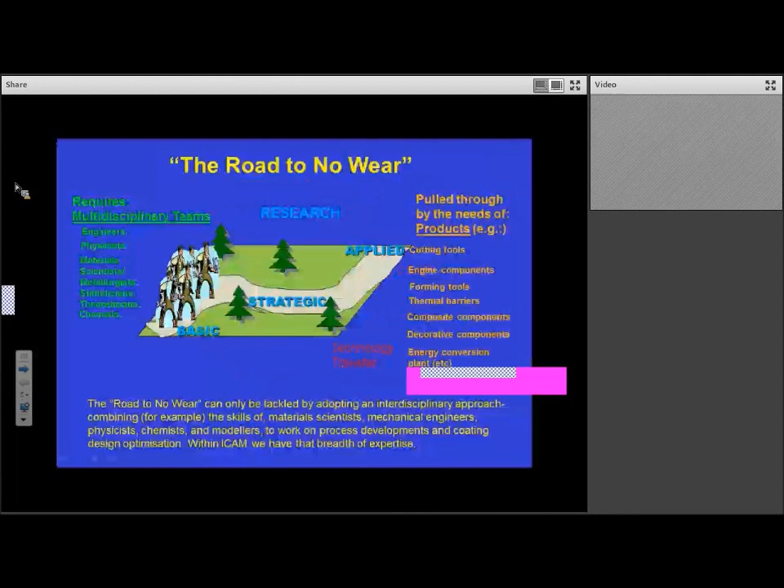The first reason is if we think about the move between research through to products, it involves an array of people: engineers, physicists, material scientists, metallurgists, statisticians, theoreticians, chemists, chemical engineers, etc. It needs all of those people to travel along this road to reach solutions for the actual end-use applications, which can be very varied in their anti-wear requirements. Within ICAM, we do have access to that whole range of skills and abilities and knowledge.

So that's the first analogy for the road to nowhere. The talk will begin with an explanation of historical background to tribology, the study of friction and wear, or rubbing surfaces. I'll talk about the importance of hardness and elastic modulus and their ratio, the importance of resilience and toughness in coatings and surfaces, the requirements of different tribological contacts, and the benefits of nanocomposite, nanolayered, and glassy metal coatings to solve the problems we identify, finishing with duplex systems and some final comments.

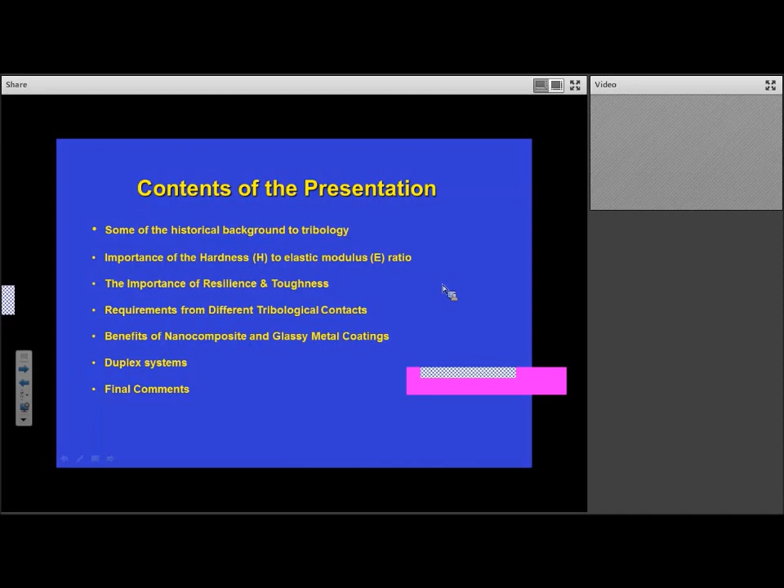If we think about the history of tribology, a colleague of mine, Kenneth Holmberg, was first to point out that we tend to study tribology at different length scales. Putting that on a time base, we realized that before the Industrial Revolution, people were interested in large machinery on the meter and decimeter scale, looking at efficiency, reliability and lifetime. Then we started looking at the decimeter down to several millimeter scale, studying torques, forces, vibrations, clearances and alignments, etc.

Then Hertz came along with his contact theories of elastic contacts, able to look at things like contact pressure, pitting and scuffing. Around 1950 was probably the birth of what we regard as tribology in its modern sense, beginning with the group in Cambridge, Bowden and Tabor, and other groups around the world. They started to look at fracture, elastic and plastic contact of asperities and deformation, debris creation and surface layers, etc.

In this present century, we've entered the age of nanotribology, which has enabled us to better understand what's gone before. We now have the tools and techniques for a better understanding of tribology. So we started at the macro scale with large machines; now we look at material transfer, tribochemical changes, micromechanical changes, cracks and fracture, and interactions on the atomic scale.

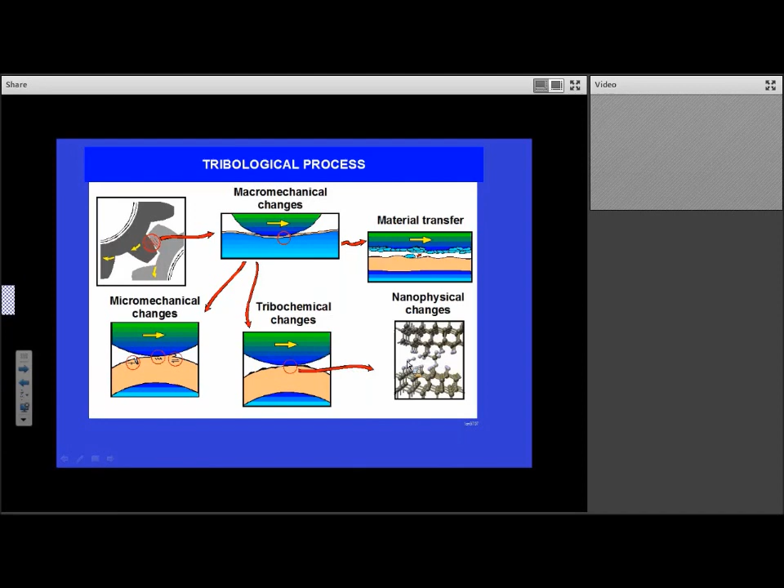However, going back to the 1950s and the Cambridge group, there was a desire to develop a kind of unified theory of tribology and see if there were straightforward equations to describe wear. Many came up with the idea that wear equals a constant times load over hardness — generally regarded as Archard's law. Regrettably, that turns out to be incorrect, and there are other properties as important as hardness.

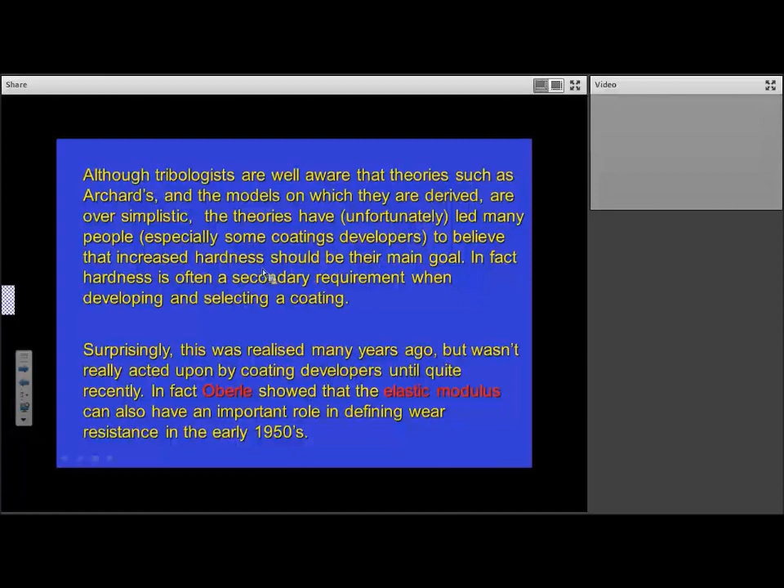A gentleman called Oberle, at the Caterpillar Company, recognized this in the early 50s, but his work was ignored. He published a paper showing that elastic modulus can also have an important role in defining wear resistance. Tribologists probably realized Archard's law was oversimplistic, but it led many people to put too much emphasis on hardness, considering it the main requirement from coatings. It's taken some time to reverse that overemphasis.

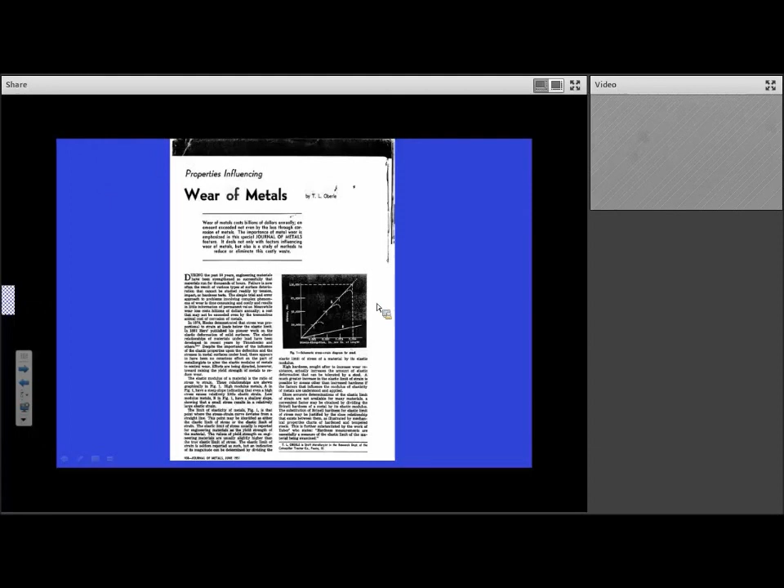This is Oberle's paper from the Journal of Metals in 1951, in which he pointed out the importance of elastic modulus. He defined what he called the Modell factor: Brinell hardness divided by elastic modulus. He found wear decreases with increasing Modell value — decreasing with decreasing elastic modulus for materials of similar hardness — but actually increases with increasing hardness if that increase is associated with an increase in elastic modulus.

He found this by doing lots of tests and ranking materials. This is an extract from one of his papers, where he got a better correlation between wear and the Modell factor than between wear and hardness, or wear and elastic modulus alone.

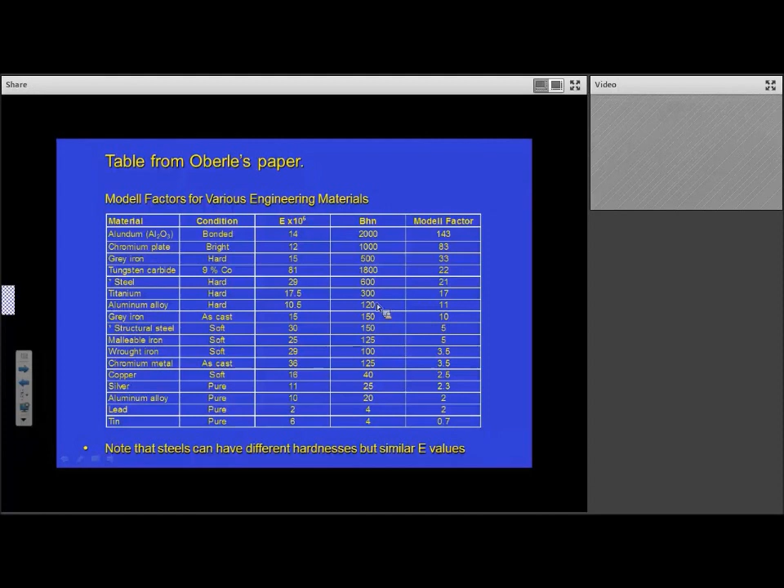And of course we can put that onto more consistent units now. We can define elastic modulus in gigapascals, and hardness in gigapascals as well. What we find is that materials with good wear resistance tend to have an H/E ratio of around 0.1 or higher. Rubber is very high, but that's a special material, and we can't make engine components out of rubber, but we can use it for tyres. Our aim in coatings development is to try to develop coatings with an H/E greater than 0.1. It's a good objective to have.

We shouldn't be surprised that H/E is important. We know that hard ceramics are wear resistant because they have a high hardness, and elastomers like rubber are wear resistant because they have a low elastic modulus. These materials are wear resistant because they're difficult to deform plastically, those because they are easy to deform but spring back. So it's understandable that a combination of those properties might give us a good indication of wear resistance.

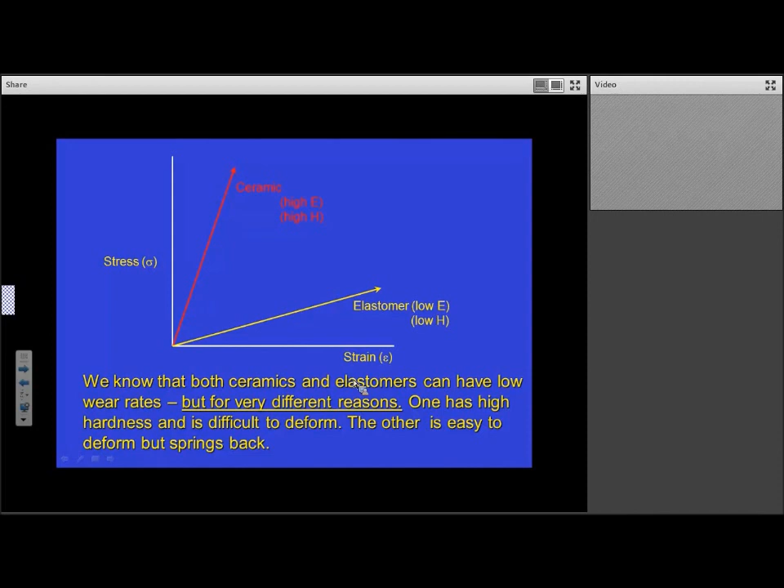Although Oberle was the first to identify the ratio of hardness to elastic modulus as an excellent ranking parameter for wear resistance, it turns out that bearing designers have known it for many decades, and they use something called the plasticity index when deciding the mechanical properties and surface finish needed on bearings. This plasticity index has an E/H ratio in it, and also another factor related to surface roughness.

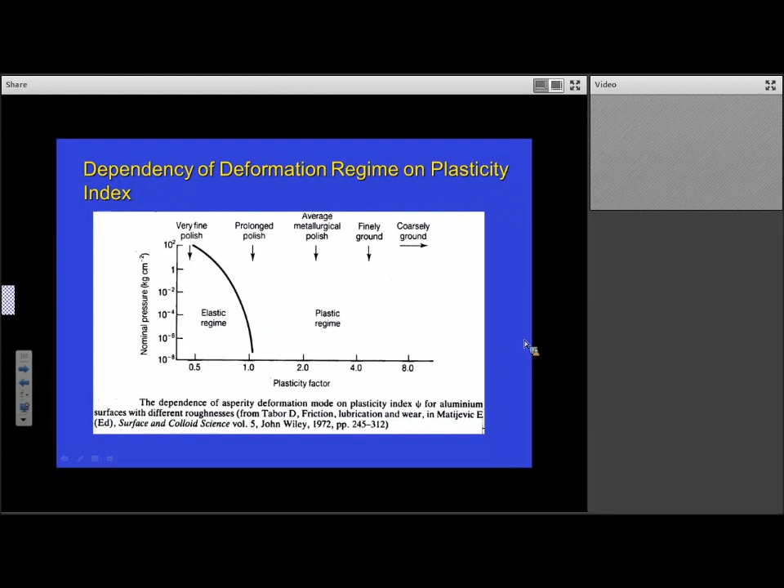The bearing designers thought they had little control over this parameter, so if they wanted to prevent a rough surface from exhibiting any plastic deformation, they'd have to polish it to a very high level to avoid plastic deformation of asperities. In textbooks you see this kind of thing, showing that to ensure a surface remains elastic and asperities don't plastically deform, you have to polish them right down to a very high finish. Now we can actually get a low plasticity index just by controlling the elastic modulus and the hardness.

That index was originally developed for uncoated surfaces, and the consideration of the elastic modulus to hardness ratio is even more important for coatings. That's because the E/H ratio defines the elastic strain to yield - the amount of strain a coating can take before yielding, and therefore its ability to deflect in sympathy with the substrate. If you take the stress strain curve, the slope of the curve is the elastic modulus.

So E is equal to Y over the strain. In this case, the limiting yield stress is Y, and the limiting strain at the point of yield is epsilon F. So E is equal to Y over epsilon F, meaning epsilon F is equal to Y over E. Since Y is directly related to hardness - typically hardness is 3 times yield stress for most surfaces - you can see that the elastic strain to yield is directly related to the ratio of hardness to the modulus.

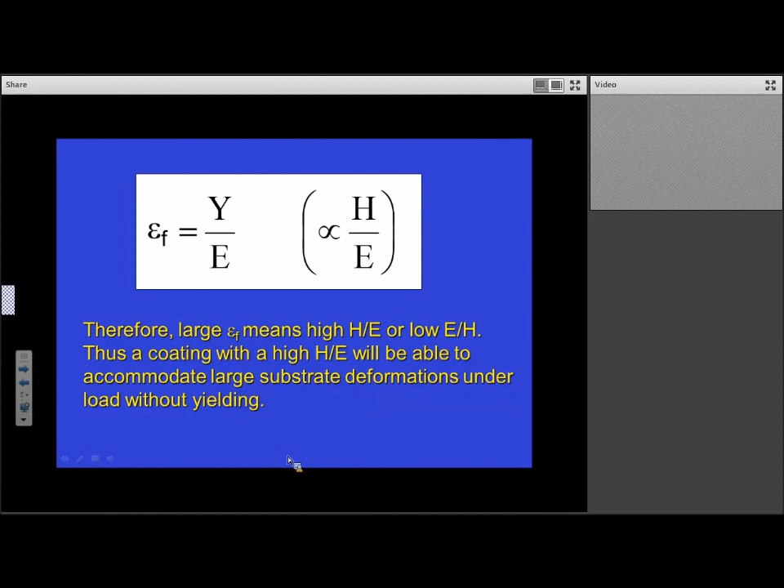So that's one reason why H over E is important for coating. Taking a simplistic view - this is just representational, not an exact scale diagram - if you had a coating which happened to be slightly softer than another coating with a lower elastic modulus, it could have a longer elastic strain to yield and therefore would protect the underlying material for longer, at a higher level of strain. So this coating could protect the material even when it's strained beyond its yield point, which would be an excellent property for a coating to have if it continues to provide protection even when the underlying surface has yielded.

There's another reason why the H over E ratio is important. It's because it provides an indication of something we call the elastic resilience of a surface - its ability to absorb energy elastically.

If you take a simple tensile test as an illustration, you pull this tensile test piece up to a maximum load of P and an extension of X. The energy absorbed elastically is the area under that curve. If you think of it simply, it's the average force times the distance moved that is the work you put in. So the energy absorbed is that area, half P times X.

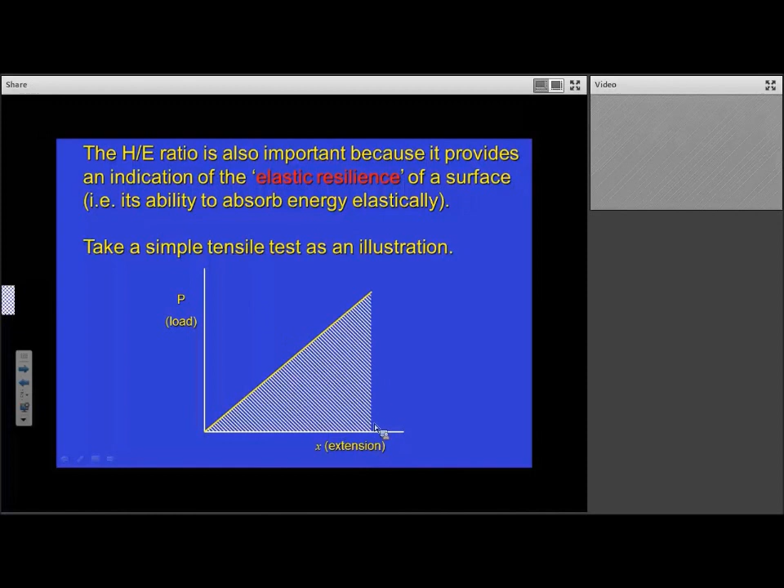Because that energy is half Px, and we know sigma is P over A, force over area, and epsilon, the strain, is equal to the extension over the length, you can transpose this, and it turns out the energy absorbed is sigma squared over 2E times the volume. The energy absorbed per unit volume is half sigma times epsilon, and that's the elastic resilience, a well-known parameter. Since the maximum sigma is related to the hardness, the ability to absorb energy elastically is related to H squared over E. So again, another reason why the H over E ratio is important.

Further work on modelling of surfaces was done by a real guru of elastic contacts, Ken Johnson in Cambridge. Ken Johnson literally wrote the book on the subject. He modelled a hemispherical indenter against a surface, and showed that the force required to yield a surface was given by this expression.

Again, you see here H cubed over E squared, so it tells us H over E is important. This is related to the fact that an elastic surface can spread the load more, so you have to apply a greater load to make it yield if the surface is more elastic, has a lower elastic modulus. That's where that formula comes from.

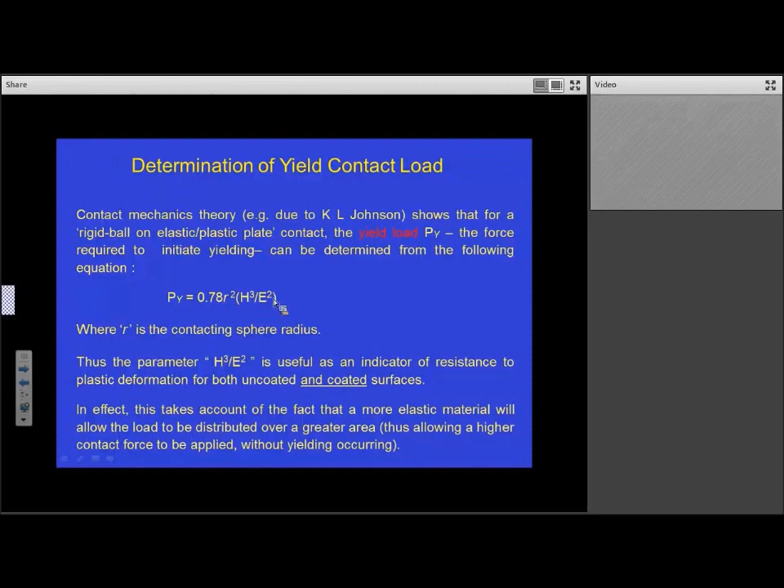There are also reasons of fracture mechanics. I won't go into it, but those familiar with fracture mechanics will know that work by Griffith and Irwin, etc., define a critical stress for crack propagation, sigma c, defined by this expression. Gc is termed the strain energy release rate, and it's a measure of fracture toughness. You can see here that Gc is sigma c squared pi a over E.

So again, we see from fracture mechanics considerations that H squared over E also gives an indication of the ability of a surface to prevent fracture. So yet another H over E ratio, which leads us to believe that the ratio of hardness and modulus is important in defining the wear resistance of the surface.

We can go further and say that H over E indicates the surface's ability to absorb energy and recover elastically, and it's particularly important in impact loading situations.

If you think about it further, the actual ability to absorb impact will be defined not only by the elastic range, but also the plastic range of the material.

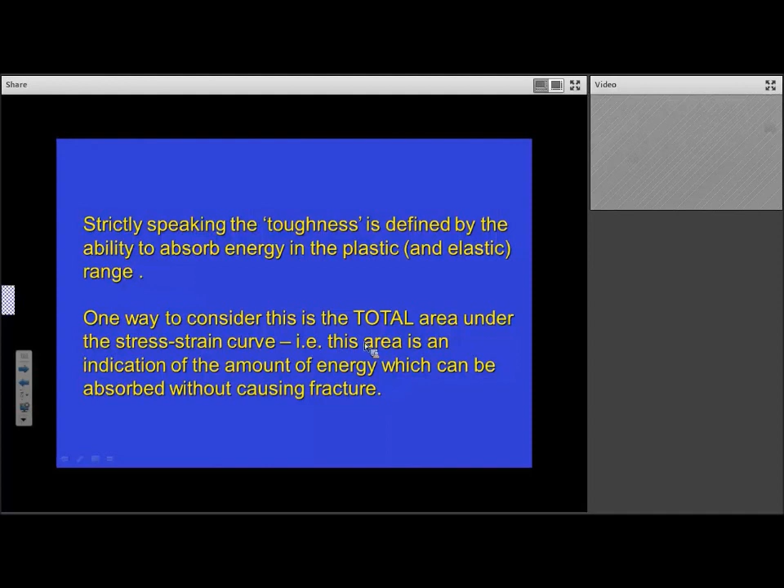A guy called Smart said that for cavitation, which is one particular kind of impact, what we should think about is not Y squared over 2E or H squared over 2E, but UTS squared over 2E. That's in recognition of the UTS being reached in the plastic state, so some ability to absorb energy can occur plastically. You should think about toughness being defined by the total area under the stress-strain curve, not just the elastic part, the elastic resilience.

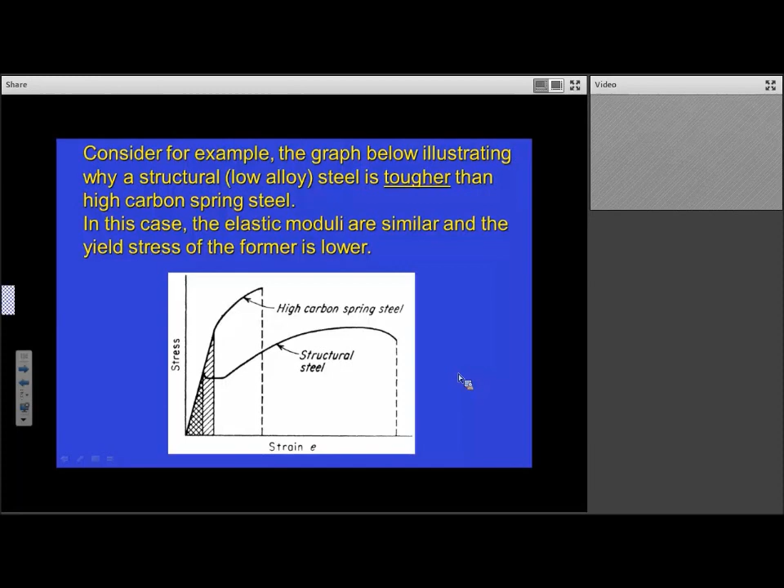So we know, for example, that a mild steel, a structural steel, is tougher than a high carbon spring steel. This might have higher elastic resilience, but the mild steel is tougher - more able to absorb impact. So now what we're getting into is that it could even be a good thing for a tribological surface to have some ductility, which goes right against the thoughts of those early tribology theorists.

There's also an argument around toughness for polymers. Another guru of the subject, John Lancaster, did a lot of studies and was one of the leading lights, sadly passed away in 2014. John looked at the wear of polymers and found that those giving the lowest wear rate were the ones with the highest toughness.

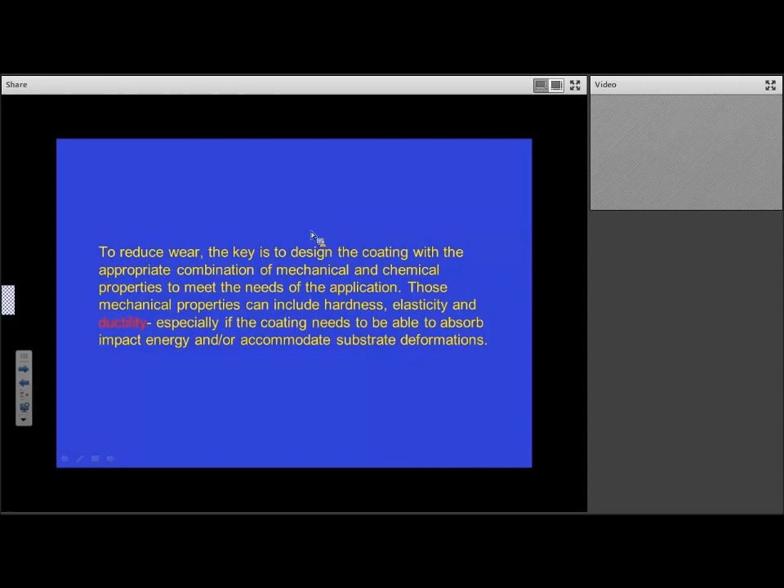So to reduce wear, the key is to design the coating with an appropriate combination of mechanical and chemical properties to meet the needs of the application. These mechanical properties can include hardness, elasticity, and perhaps surprisingly ductility, especially if the coating needs to absorb impact energy or accommodate substrate deformations.

If a coating contains a ductile constituent, it can be tougher. An illustration of how combining low and high modulus phases can be beneficial in a coating would be a multi-layered coating with a hard, soft layered structure.

Such a coating can deflect under load without fracture, since the softer, lower modulus layers absorb the shear deformation.

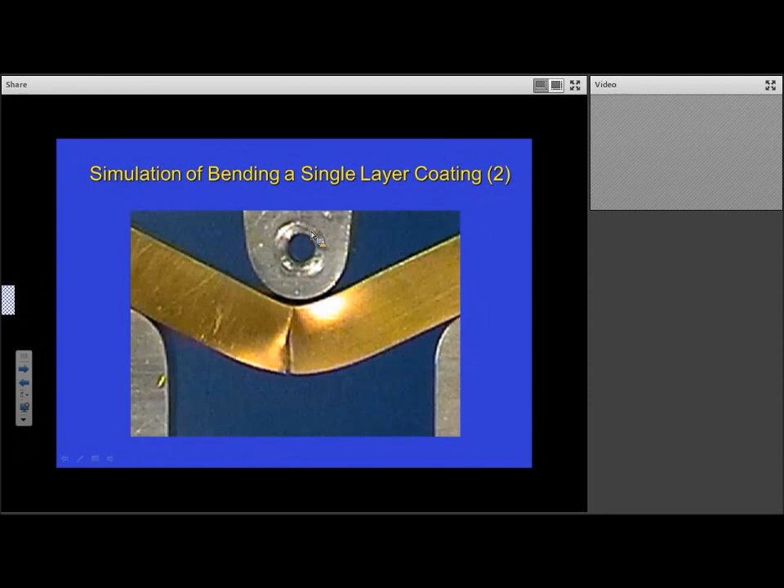If you consider this as a thick coating and you load it, and the substrate deforms, the coating could crack. If, however, you have a thick coating with layers of hard, soft - or high modulus, low modulus another way to think of it - and you load it, then it won't crack.

The hard layers are thinner, so they don't see such a high bending stress because they're thinner, and they're allowed to deform because the shear takes place in the soft, low modulus layers.

If you think of a paperback book and you bend it, it will obviously bend. Even though it's wood really, if it was a block of wood it would break. Because the layers can slide over each other, they don't break, and each layer is thin, so it doesn't see a high bending stress.

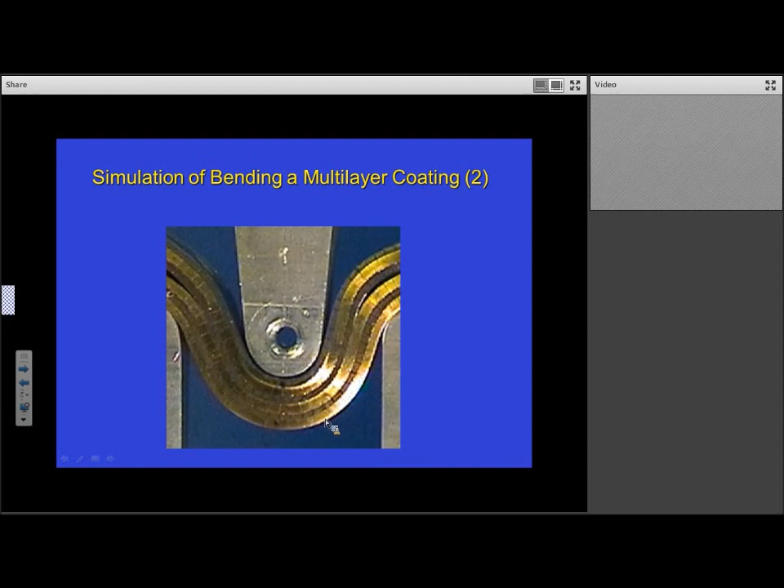Those of you who studied stress analysis will recall that the maximum stress increases with distance from the neutral axis. So from a thick section you get a high bending stress. For these thin sections, you get lower bending stresses and an ability to accommodate deformation.

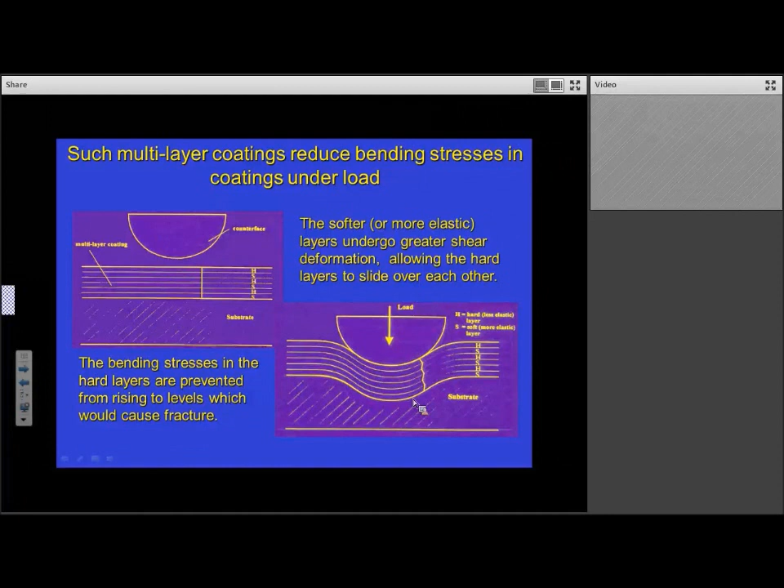This shows how, hard soft, the shear takes place in the softer layer. But this is just meant to represent how it's better to combine properties in a coating, to combine hardness and ductility and elasticity, in order to get the optimum response to loading.

So how can we achieve that obviously desirable combination of hardness, elasticity and ductility? One answer is by using nanocomposite or nanolayered coatings.

This is the other area where the road to nowhere comes in, because even the Romans knew that the best way to create a wear-resistant surface was to have hard blocks separated by a compliant, if you like, grain boundary phase, which can accommodate the deformation.

As the chariots rode over this road, if that was a solid piece of stone, it would just break up and fail. Whereas with this kind of construction, a cobbled road construction, it can accommodate the loading and deformations without failure. This is where we take that analogy of the road to nowhere a step further.

We use this concept to help us design nanocomposite coatings.

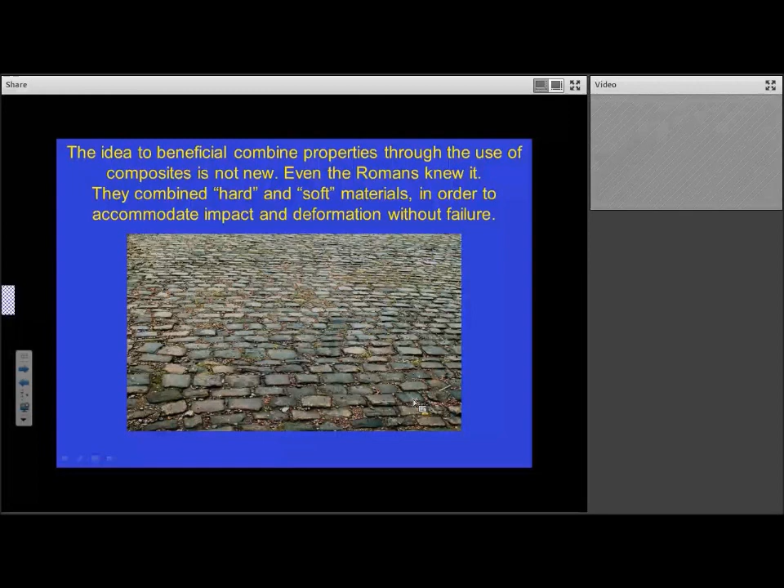There's an illustration here of a real-life multi-layer coating. This is a multi-layer titanium nitride coating. Titanium nitride coatings typically spall off at about 10 microns thick due to buildup of stress.

But by having this kind of thick coating in a multi-layer, it survives and accommodates deformation very well without debonding. These kinds of coatings are now used on compressor blades, especially where they're used in sandy, abrasive environments. This information is courtesy of Wallwork Cambridge, Tecvac.

So a perfect example there of a real-life coating which would fail if it wasn't for the fact that it combined hardness and ductility and an ability to absorb impact energy.

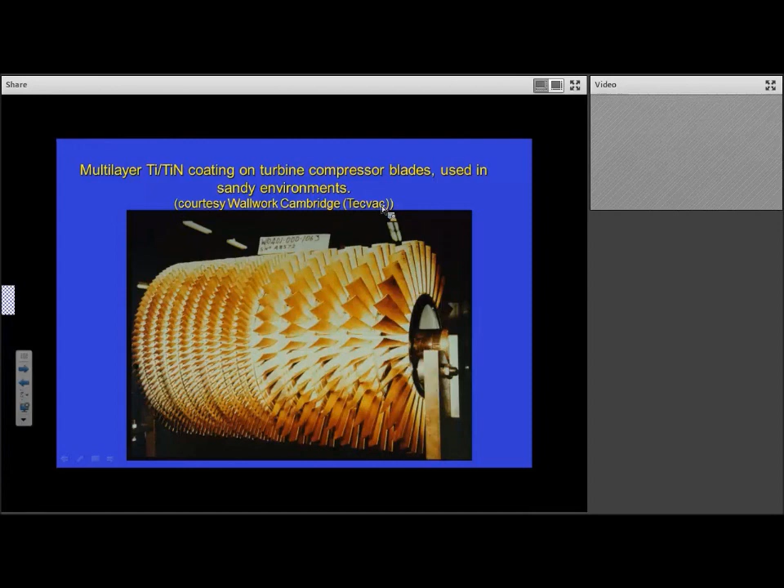So why, that's a layered structure, but why are nanocomposites even better? Well, a number of reasons. One, with nanocomposites, is we can get so-called Hall-Petch hardening. We can get grain size induced hardening.

We can retain the elastic modulus of the metallic species in that composite. And there's a further benefit: the corrosion rates are more uniform. Intergranular corrosion is suppressed, so degradation is more uniform and predictable. We don't get localized pitting corrosion.

So overall, with a nanocomposite, we get an enhancement of H over E, and we get good corrosion resistance and better wear resistance overall.

One of the earliest proponents of nanocomposite coatings was a guy called Musil in the Czech Republic, Jindřich Musil. He originally said the idea would be to have a metal nitride in, for example, an amorphous soft metal grain boundary phase.

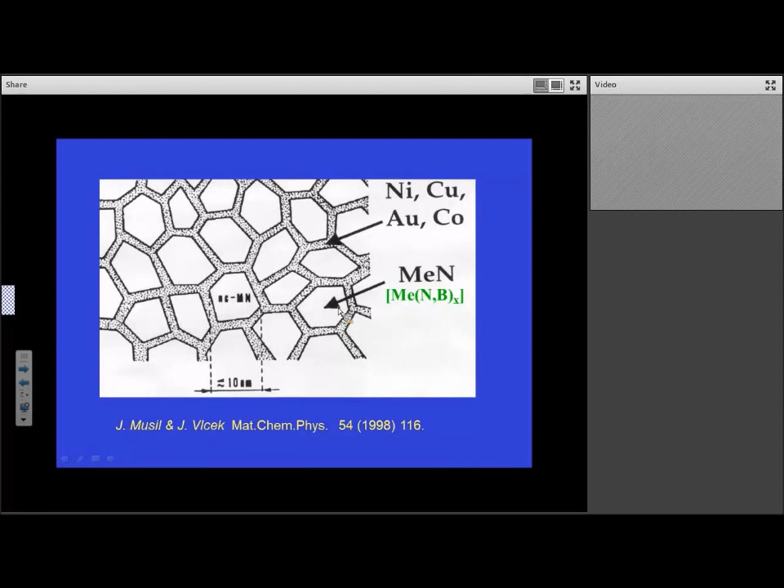Our approach is to go slightly further than this. What we're looking at is nitrogen or boron interstitially hardened metal crystallites within a soft metal matrix, to try to retain that metallic characteristic in terms of ensuring a low modulus phase, but still getting a hardened effect due to the interstitial hardening within the grain.

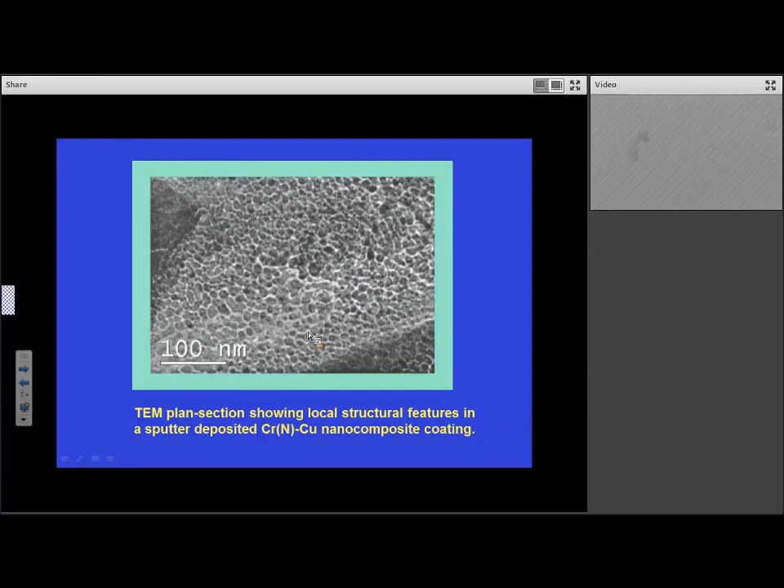This shows a typical example of such a coating: chromium with nitrogen interstitial hardening in a copper grain boundary phase. These coatings are remarkable because they're basically metallic, but they have ceramic-like hardness levels, yet metallic-like elastic moduli.

They can accommodate deformation, which means they perform very well in a tribological situation because of their ability to absorb and accommodate deformation while still being quite hard.

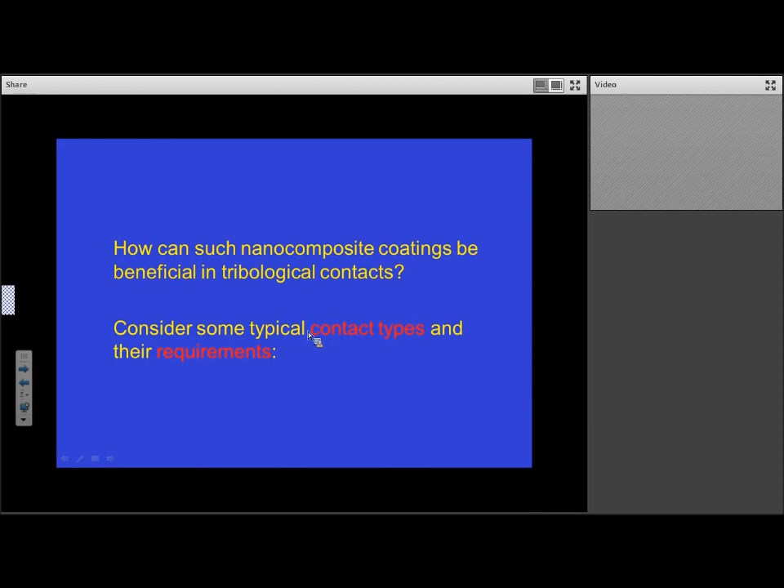So how does a nanocomposite coating be beneficial in tribological contacts? What I want to explain is that the requirements of different types of contacts are many and varied, and they aren't just hardness. So we can't just believe Archard's equation.

We can't just assume that we need hardness to get appropriate reductions in wear. So we look here at 7 typical types of contact, and I'll go through each one and explain what we're looking for in terms of the properties of the coating and the underlying substrate. For example, with a simple static contact stress, you need load support, adequate strength within the coating, adequate hardness, and sufficient toughness.

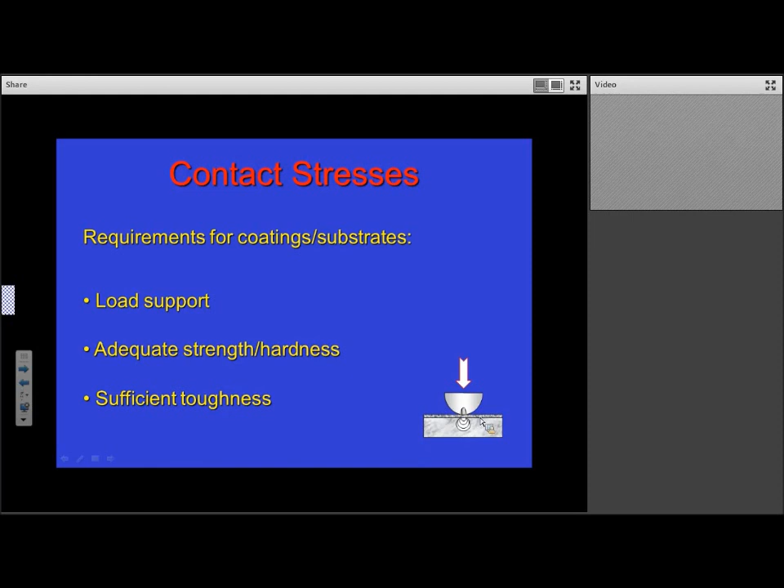Toughness is clearly important. You don't want cracking to occur. For a sliding contact, you probably need low friction. You need sufficient adhesive strength between the coating and the substrate, and adequate cohesive strength within the coating and within the substrate as well. And you need sufficient elasticity in the coating to deform with the substrate without fracture.

For a fatigue situation, normally you need good surface finish, crack arresting capability, adequate hardness and toughness as well. So although hardness comes into many of these requirements, it is by no means the only requirement.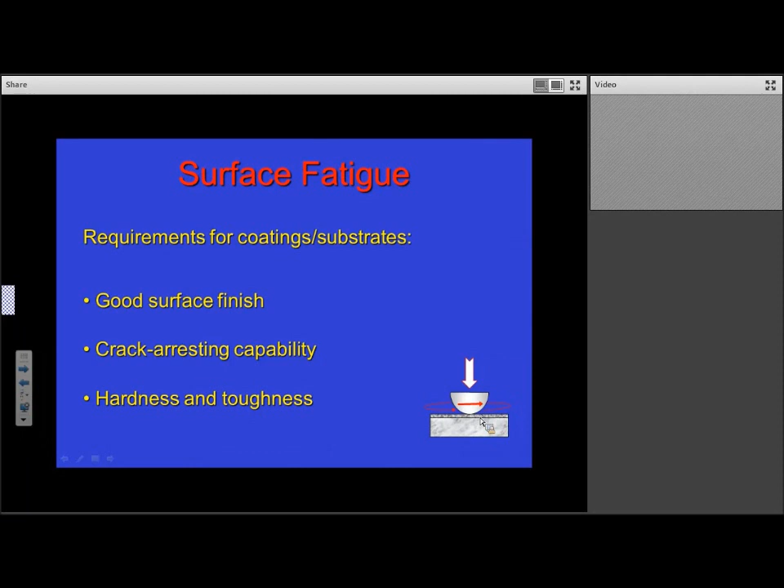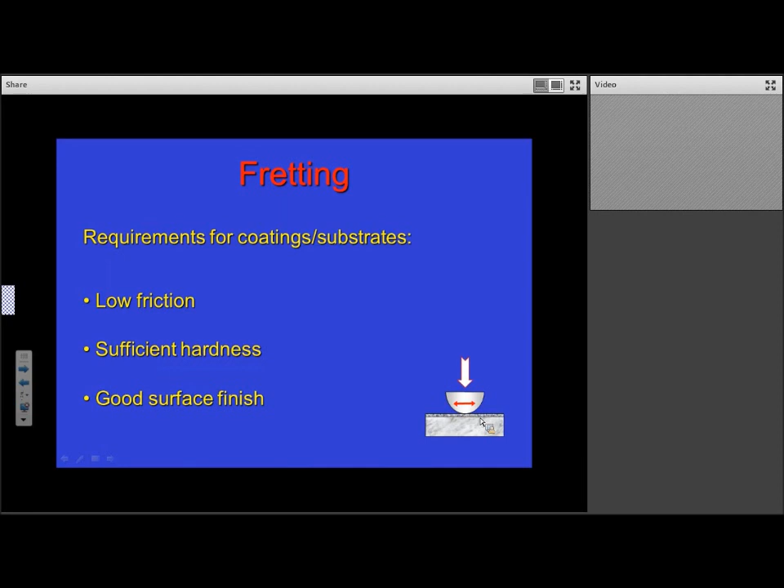If you think about fretting, that's a low amplitude fatigue type situation. You often need low friction, again sufficient hardness, but there's still a lot of discussion over the relative importance of hardness and ductility in fretting contacts, and you need good surface finish.

In abrasion, that's probably the mechanism where you really do need hardness. Many studies have shown that typically to resist abrasion by a hard abrasive particle or a hard counterface, your surface should be at least 30% higher in hardness than the abradant.

So for sure we need hardness, but we also need toughness. We need adequate thickness of the coating so that any abradant doesn't penetrate through it. And then you need load support underneath the coating, again to prevent that abradant penetration through the coating.

Another of those types of contact which I illustrated was impact. Requirements for impact resistance are definitely toughness, ability to absorb energy. So you need elasticity and deformability, good adhesion of the coating to the substrate, and cohesive strength both within the coating and within the substrate.

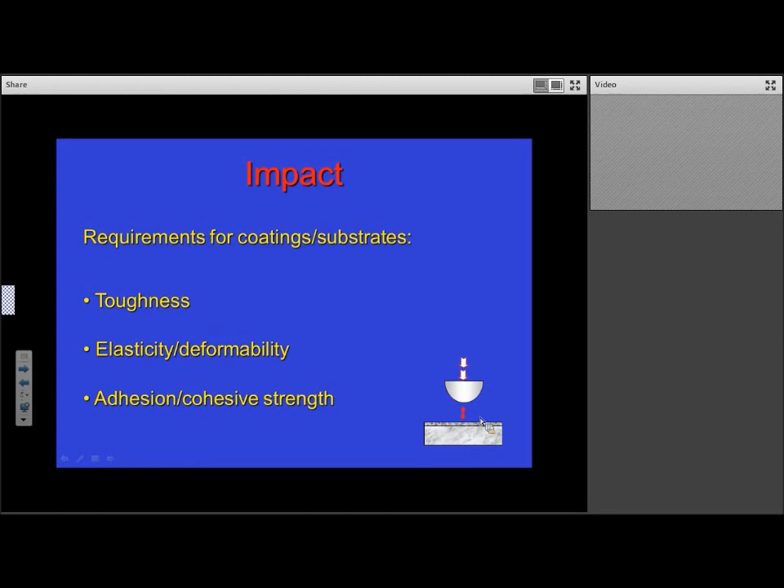And then the final schematic I showed of a type of contact was chemical dissolution or corrosion. In that situation, you need a pore-free structure, ideally, and you're going to need either a completely chemically inert barrier, or suitable galvanic properties within the coating. So again, we saw that many of these nanocomposite coatings give a dense, relatively pore-free structure.

So requirements for wear-resistant coatings are clearly complex and depend on the type of contact. But the other point to make is that all of those contact types could occur together, remarkably, and to different extents during the life of a component. So any coating you develop or apply should ideally be adaptive to changing contact conditions.

Sometimes we call these chameleon coatings or adaptive coatings. So that's a further requirement, and it has been found that nanocomposite coatings do provide the possibility to add this adaptability to the coating.

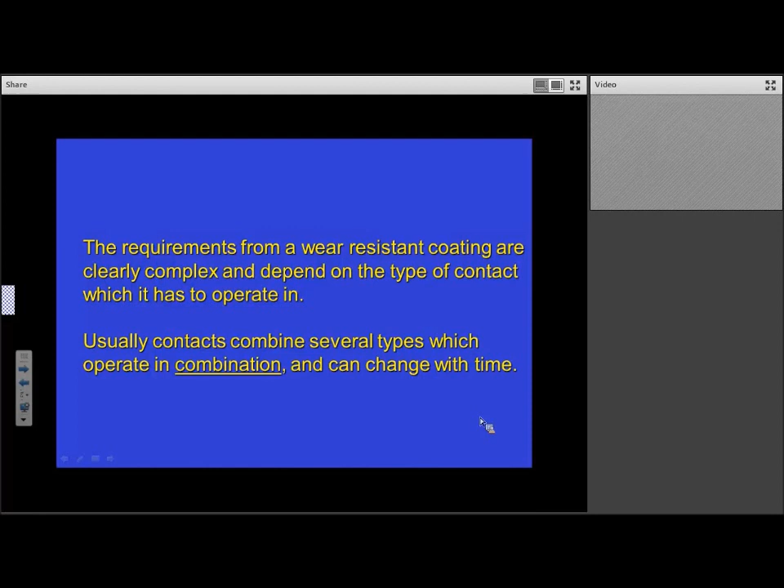So I would say that most tribological testing has historically tried to model just one type of contact, such as a unidirectional sliding contact, like a pin on disc. And much theory, including Archard's, is based on rather unrepresentative types of contact. For example, little attention has been given to repetitive impact contacts.

We've looked at this, we've developed impact testers, and we've looked at the behavior you get with different coatings under impact conditions. This is a pneumatically operated impacting machine, and the sample would be here, impacted by, maybe, a tungsten carbide ball hitting the surface at high frequency.

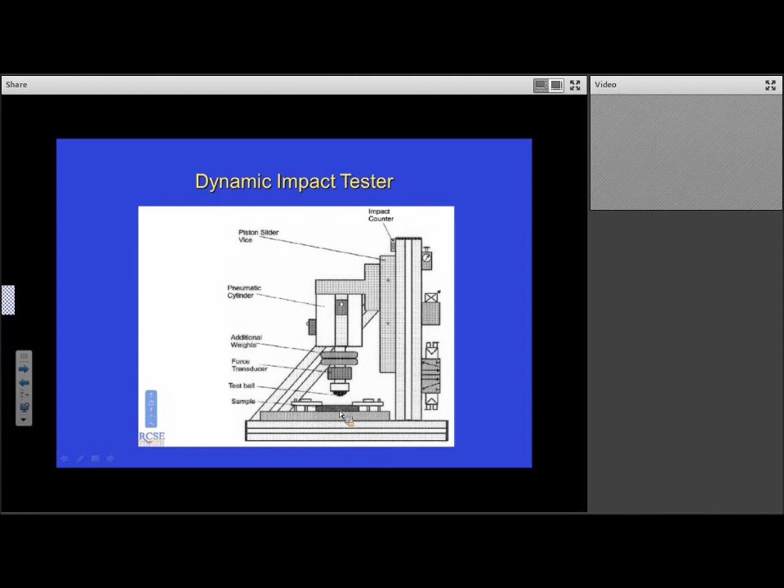And then we look at the nature of the failure under the impact area. You can get cracking in the indent region, build-up around the indent, cracking around the indent, depending on the coating and the different properties of the substrate and the coating.

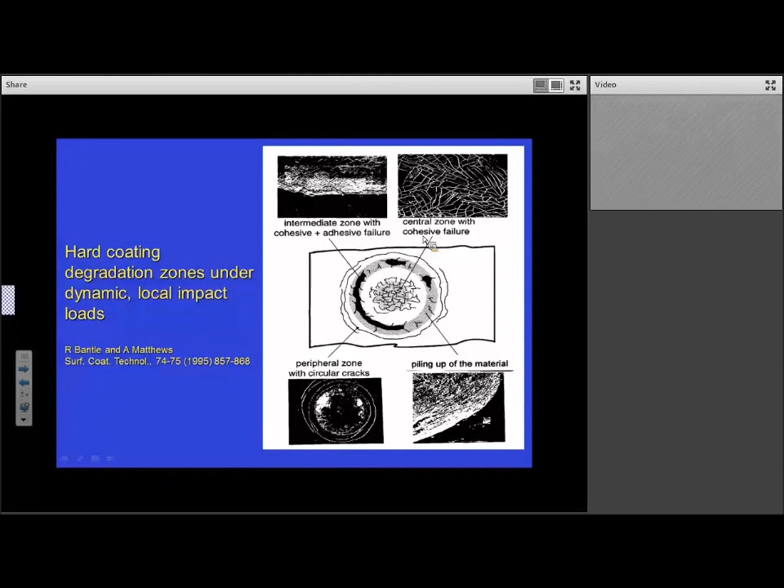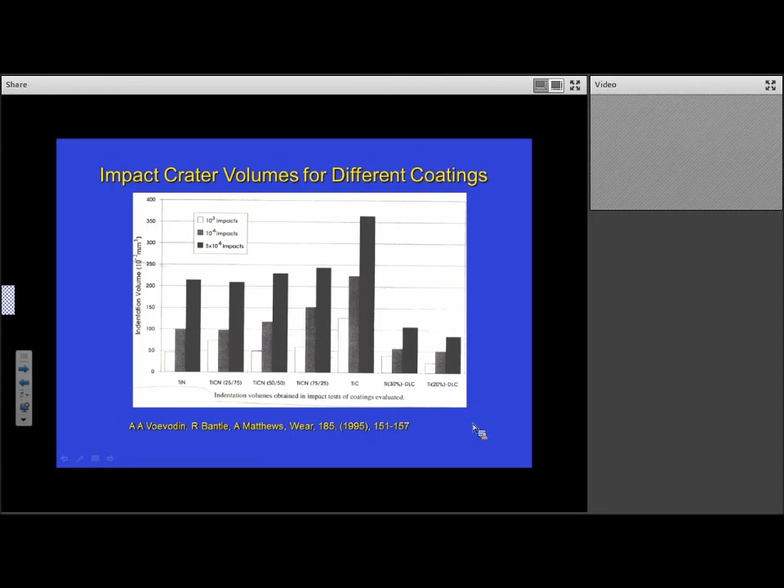And what you find in that impact test is the coatings that gave the best impact resistance, the lowest impact volumes, are the more elastic, less hard coatings. And this is really brought out best when you look at the indents after 1,000 impacts, 10,000 impacts, and 50,000 impacts.

So that's one example of a test that's shown that coatings with a high hardness to modulus ratio perform very well.

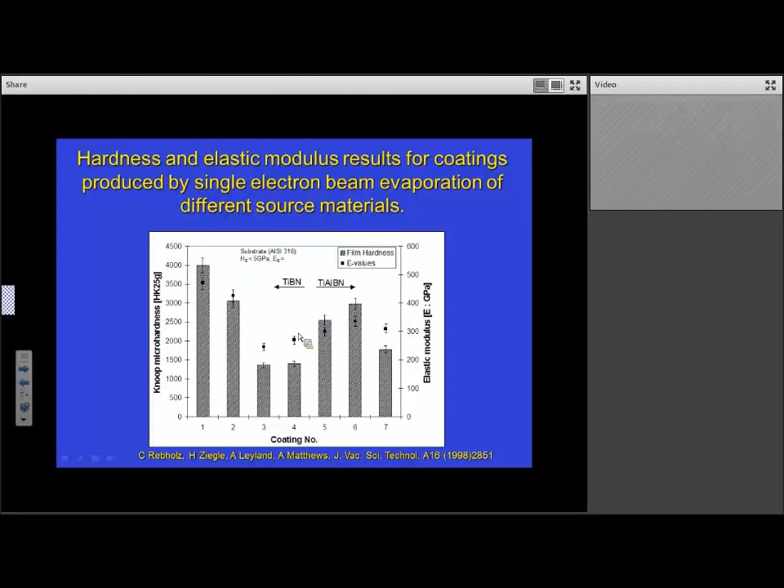Sure enough, as you might expect, when wear tests were done on these, it was those with the highest ratio of hardness to modulus which performed best in those tests. That confirmed that coatings must provide adequate hardness with the degree of elasticity and toughness needed for the application.

The previous example was for a ceramic nanocomposite. But there's now increasing evidence that metal-based materials offer advantages over those with a high ceramic content. For example, a relatively soft nitrogen-doped chromium coating can provide better performance than a harder chromium nitride coating in impact tests. Also, carbon-doped tungsten films have been shown to give better performance than single-phase tungsten carbide coatings in abrasive contact conditions.

So just to illustrate this: if we've got a chrome coating and we add nitrogen, we look at the hardness—it increases as we interstitially harden. Then we put more nitrogen in, we get more of the ceramic phase, more Cr2N and CrN.

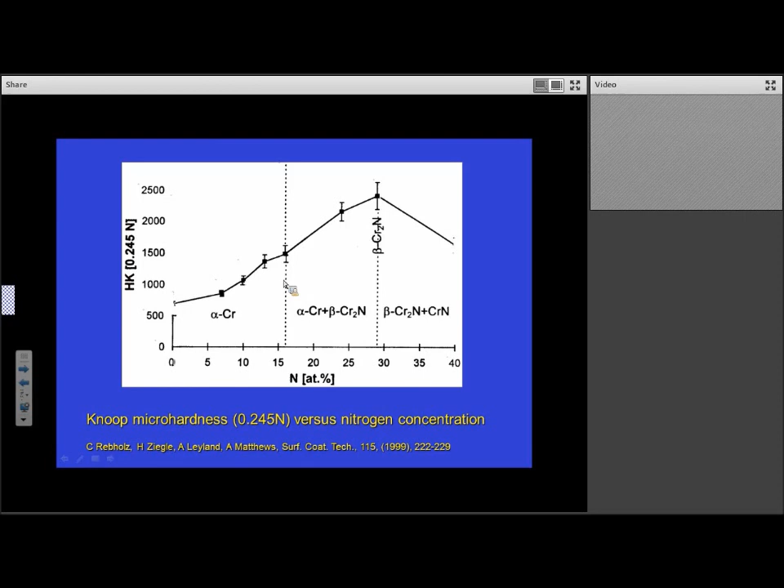Then if we do an impact test on these, the coating that performs best is the relatively soft but elastic interstitially hardened chrome, rather than the very hard chrome nitride.

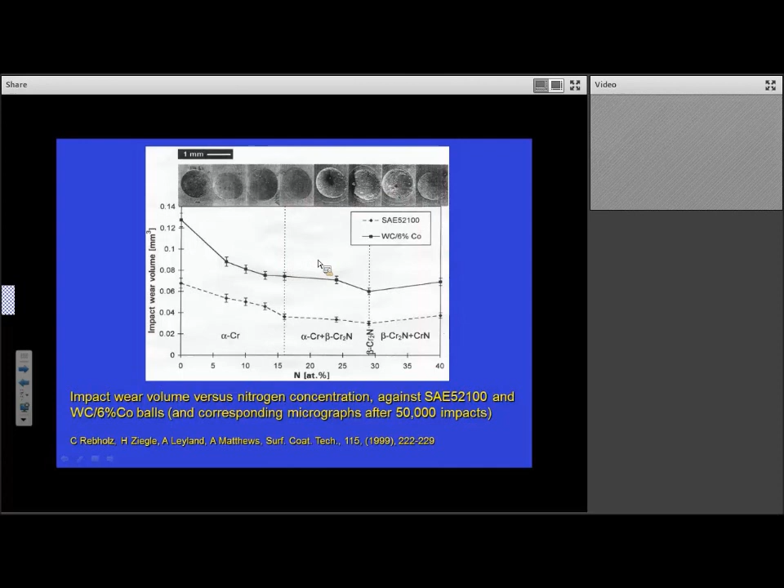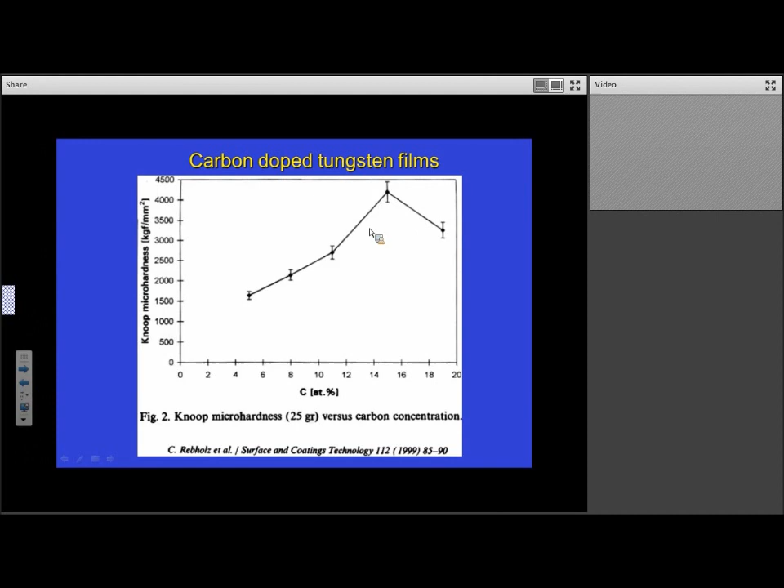We looked at some carbon-doped tungsten—as carbon is added to tungsten, hardness increases and you form the ceramic phase, but down here it's relatively hard, not as hard as the full ceramic phase. Guess what—in the rubber wheel abrasion test, the coatings that performed best weren't the hard ones. This really goes against even the theories devised for abrasion wear. It was the ones that were slightly less hard but more elastic that survived best in that arduous test.

So we can see that these metallic-based coatings can perform very well. So what design considerations should there be for these nanostructured and even amorphous coatings?

I've already mentioned the excellent work done by Musil, and one of his contemporaries at the time was Stan Veprek, who was at Munich University. Stan's main aim was to get super hard ceramic nanocomposites, so he set out to get very, very hard coatings using a ceramic approach.

He used a metal nitride nanocomposite in an amorphous silicon nitride matrix and achieved very, very high hardnesses—that was always his aim.

We kind of moved from that and looked at titanium aluminium with nitrogen additions in an amorphous boron nitride matrix, in order to get hard but yet relatively elastic nanocomposite coatings.

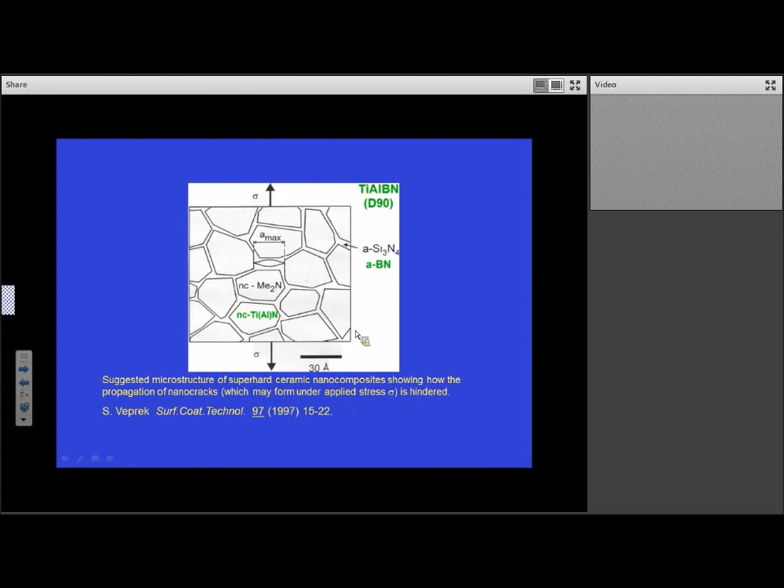It's good that we can use sputter deposition techniques and electron beam techniques to do, in a way, combinatorial studies on the effects of different compositions of these materials. In a single run, you can get a variety of compositions and look at the behavior of those different compositions in nanocomposite coatings.

So this is some work that Claus Rebholz did and has continued to do.

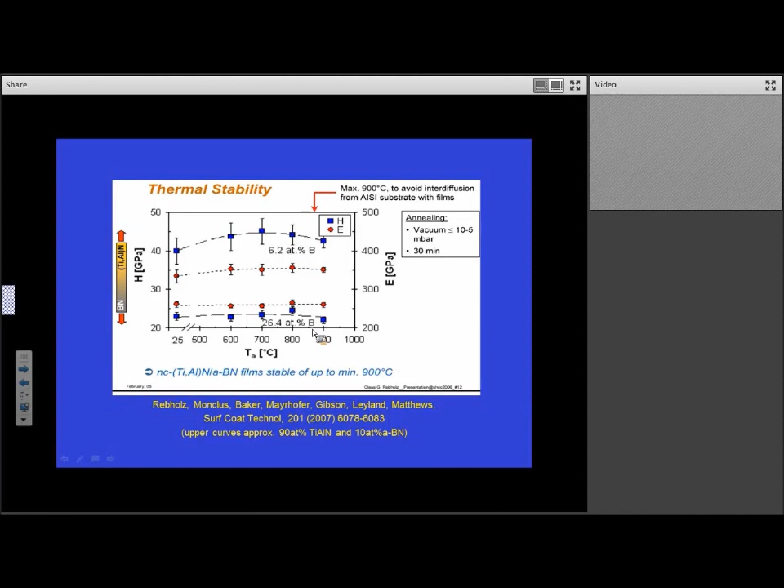I wanted to mention this because many people ask what's the point of having a metallic nanocomposite, since it won't be temperature stable. But actually we've proved that some of these metallic nanocomposites are remarkably temperature stable. This work showed the hardness and elastic modulus stability even up at 900, and it was stopped there because of the risk of diffusion with the steel substrate. So many of our preconceptions about metallic nanocomposites proved unfounded, and they perform much better even under extreme conditions than you might expect.

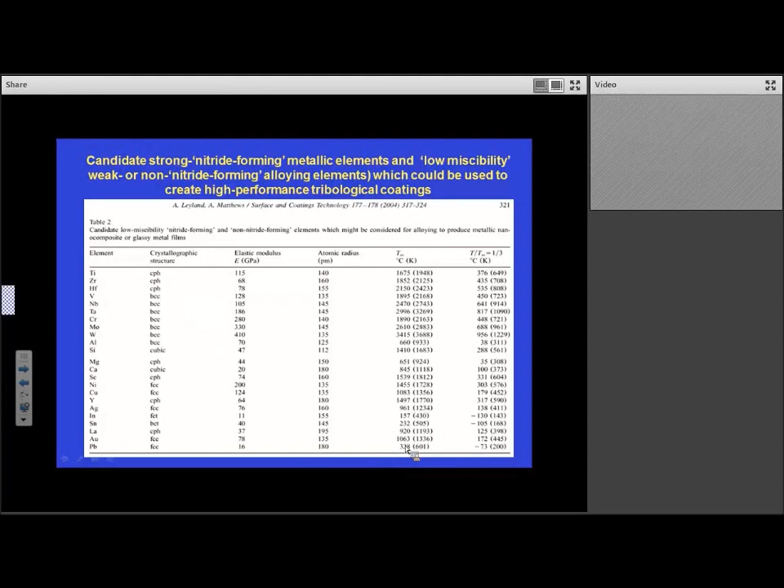There are many of these nitride-forming nanocomposites we've yet to explore. This is an extract from a paper that Adrian Leyland and I wrote, and from a chapter in a book. There are many theses to be written around the concept of metallic nanocomposites, across a whole range of nitride-forming metals and non-nitride formers, in order to get the optimum mechanical and even chemical properties in these mechanically enhanced nanocomposite coatings.

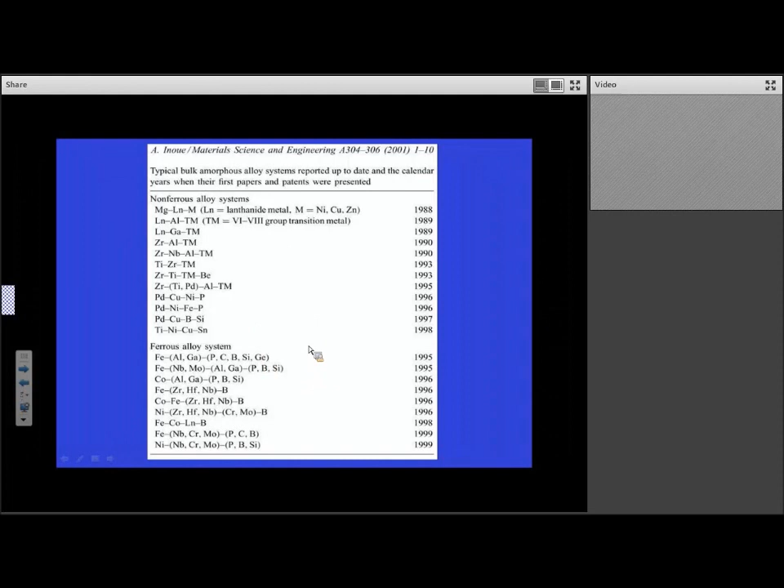That leads us on to another class which I group with the nanocomposites - the glassy metals, which follow some of the same arguments we've made for metallic nanocomposites. The glassy metals also often have high yield strength, low modulus, better corrosion resistance, and better fatigue resistance, even than nanocomposites. Sometimes oxidation resistance could be questionable, and their ductility can be questionable, but there are certainly many glassy metals for us to research. According to our theories of hardness and elastic modulus, these materials should give us good wear resistance.

Those of you unfamiliar with glassy metals - the person who developed the theory was Hume-Rothery, the chap we can thank for the different theories. It's all to do with the mutual solubility of atoms in the metal alloy, generally restricted when the difference in atomic radii is 14% or more, as large or small atoms don't tend to mix well with average-size atoms.

So even notionally very similar metals with high relative mutual solubility can be expected to experience a degree of lattice distortion on the nanoscale when alloyed. Also, atoms of similar size with incompatible valence electron configurations prefer to adopt different crystal structures and tend to exhibit a wide miscibility gap when alloyed in a solid state - providing scope for the development of metal nanocomposites and metallic glasses, which is the whole basis of this theory.

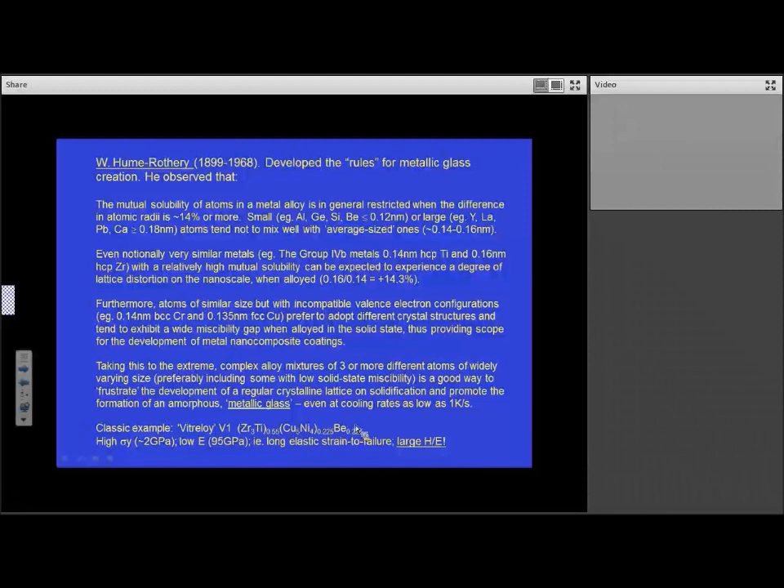An example of a metallic glass would be Vitreloy, which is zirconium, titanium, copper, nickel, beryllium. Many of these materials tend to have a high H/E ratio. So there's a lot to be done - lots of PhD theses to be written around the area of metallic nanocomposites and glassy metal nanocomposites.

This shows some results from our work - I don't have time to go into detail, but this shows the amount of copper and the range where we're getting good wear resistance, for copper contents between about 3 and 20% in this particular case of chrome-copper-nitrogen. But a word of caution: there's a big difference in wear resistance between 3% and 3.3% copper here. So obviously much research is still needed to optimize the copper content.

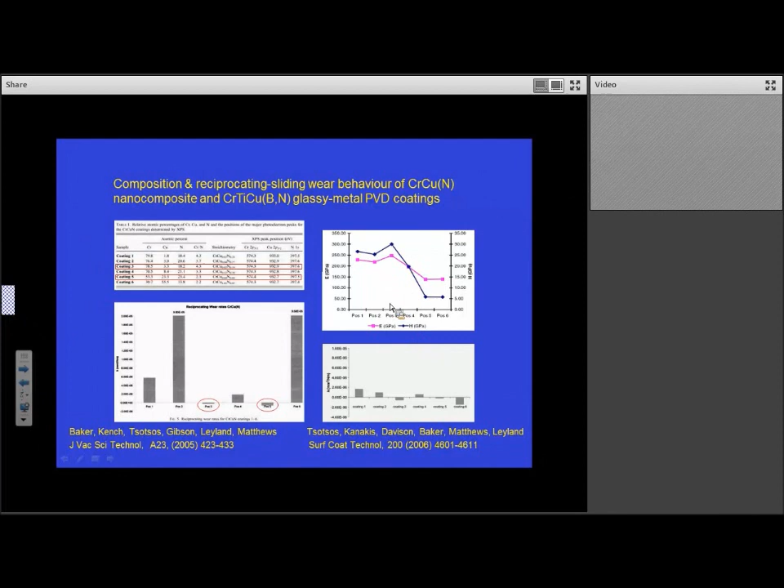You could say the same of this particular glassy metal we looked at - chrome, titanium, copper, boron, nitrogen - which tended to show that it isn't just the hardness and modulus that controls wear performance, but also the chemical nature and chemical interaction. So there's much to be done to further study the glassy metals and optimize them for particular types of contacts. And again with these glassy metals, one useful characteristic is that they can harden with increasing temperature.

I don't know if annealing is the right word, but they can harden with elevated temperatures. So again, very, very interesting properties within the glassy metals.

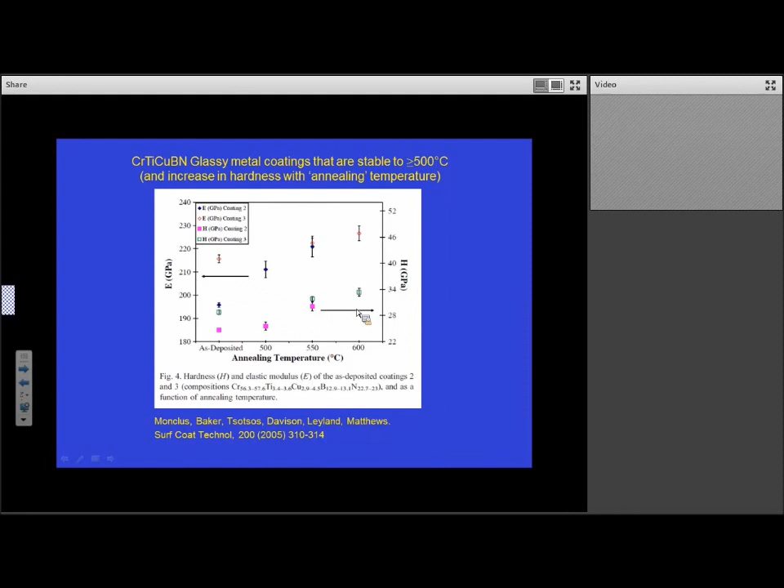These promise elevated temperature lubrication, possibly antibacterial properties. Many people have looked at the antibacterial benefits of silver additions in nanocomposites, not least ourselves, and others have looked at the elevated temperature, this adaptability concept, the chameleon concept for coatings, changing the properties at higher temperature or under different types of environments.

In fact, I found this diagram from NASA where they're looking at some copper-based alloys. This is a copper chromium niobium with pretty remarkable high temperature properties. You just wouldn't expect some metallic-based materials like this to offer excellent performance at high temperature, but they really do.

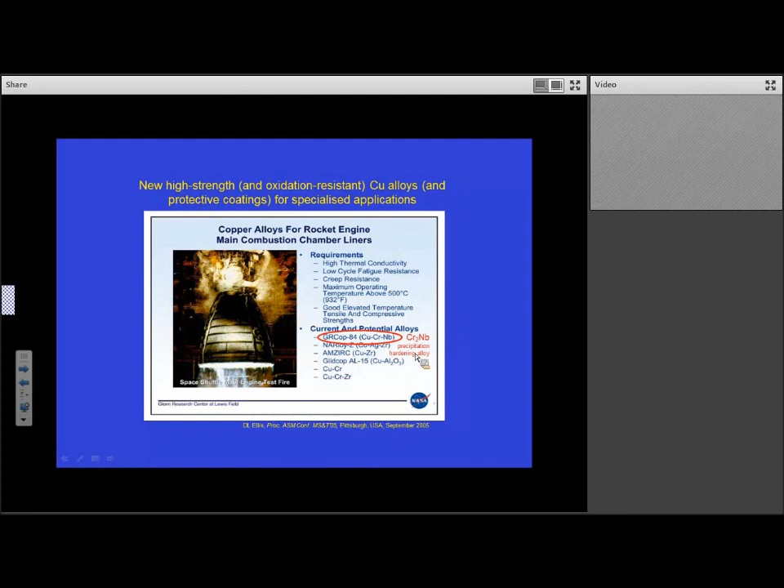And this is a precipitation hardening alloy which gives excellent performance in this kind of series of systems. Many papers now out there on things like chrome copper films, and this particular coating is offering excellent protection at high temperature, at 650 degrees C, in terms of weight reduction in weight gain.

And the results so far with our chrome copper nitrogen and chrome titanium copper boron nitride have shown that these nanocomposite and glassy metal coatings provide very effective protection in both erosion and high temperature oxidation situations, extreme environment conditions, if you like, sometimes due to the capability to form a protective chromium layer on the surface.

And other people are interested in super elastic coatings, shape memory materials, nickel titanium.

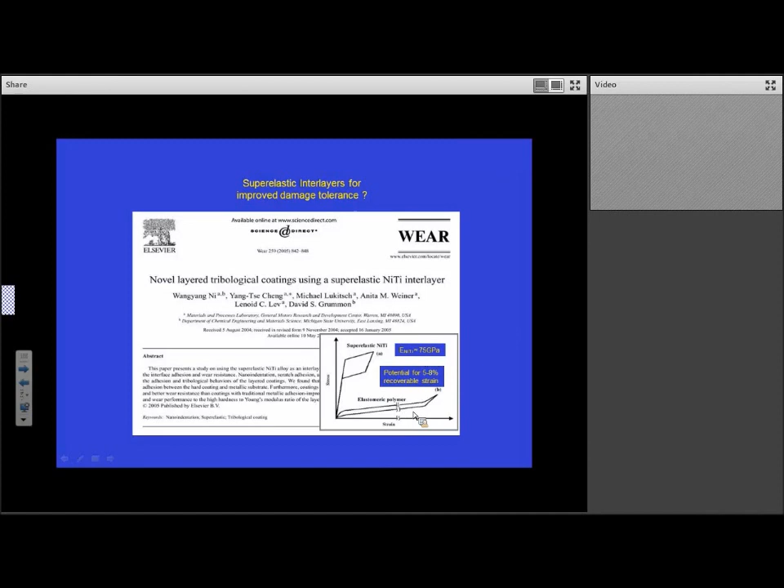Some people say that these will offer good performance. Many people, again including ourselves, are looking at these with alloying additions, including niobium and copper, still looking at the effect of the material in the heat generated in the sliding contact.

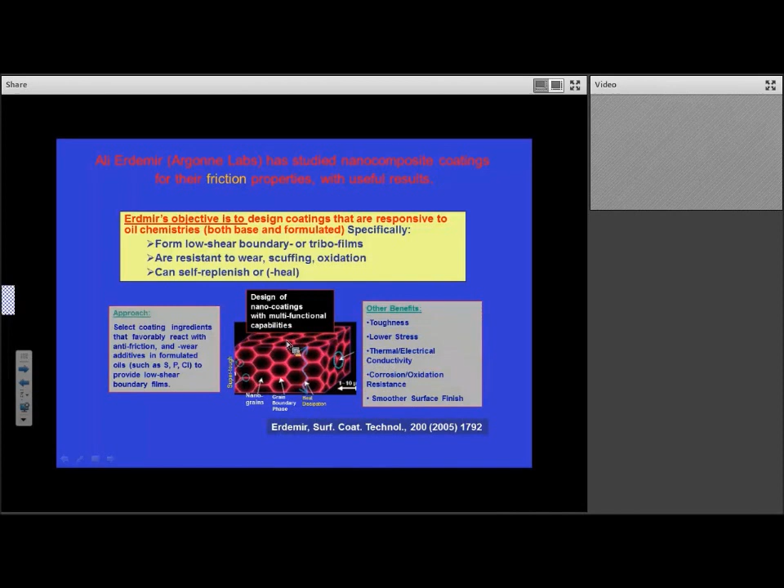I just wanted to mention quickly Ali Erdemir's work, which is not really related to our work on wear, but he looks at these materials from the tribological effect. Again, he looks at the nanocomposite from a toughness point of view, but also from the interaction effect in lubricated contacts.

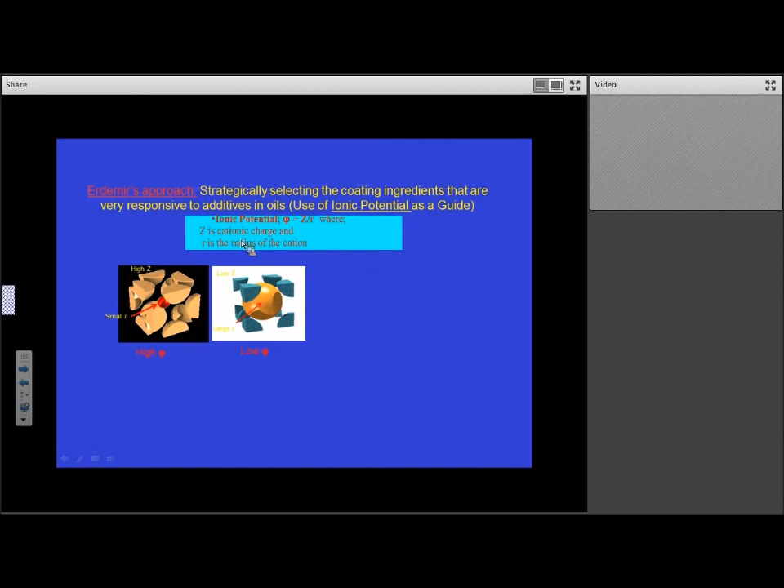He looks at something that he calls the ionic potential, which is the cationic charge divided by the radius of the cation, and he talks about how this parameter, ionic potential, can enhance the performance in a lubricant. He says that the higher the ionic potential, the lower the friction coefficient.

These materials have increasing ionic potential and reducing friction. One of the materials he looks at is molybdenum nitride with copper, and you can see a very dense structure.

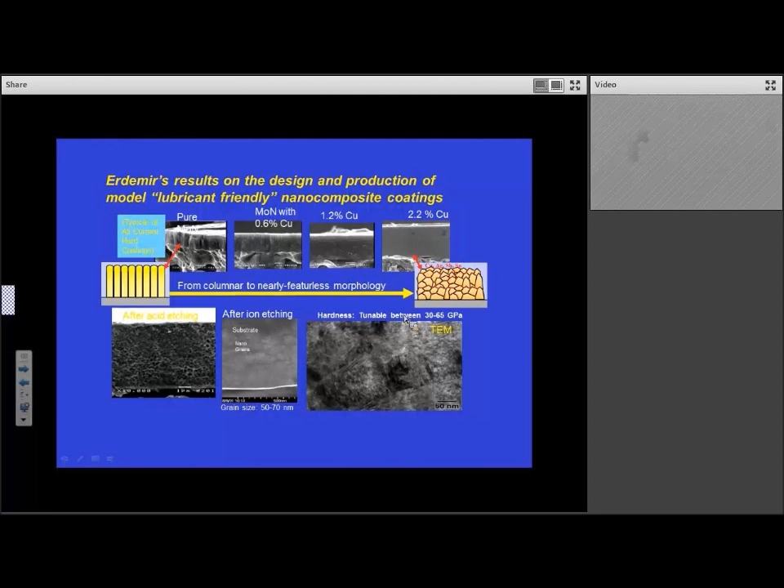So I just thought it was interesting that he looks at it from a friction perspective, but we look at it from a wear perspective, and these materials still seem to be very promising. You can see increasing ionic potential gives the best performance from that particular material. He explains it in terms of the effect on the Stribeck curve that this material can have. I'm sure there's more work to be done in that area.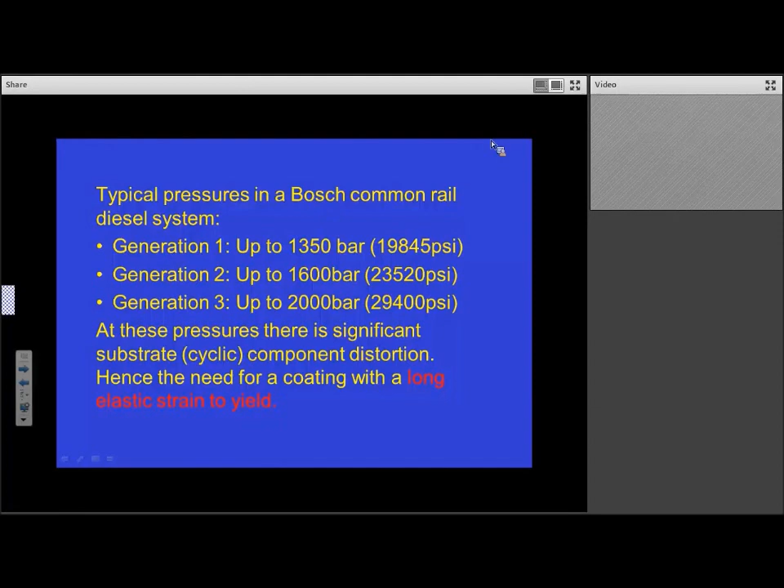So you can imagine that those parts are expanding and contracting hugely, and that further emphasizes the need for a long elastic strain to yield so that the coating can absorb that deformation and spring back without failure. Very important. Those coatings are used in all kinds of things.

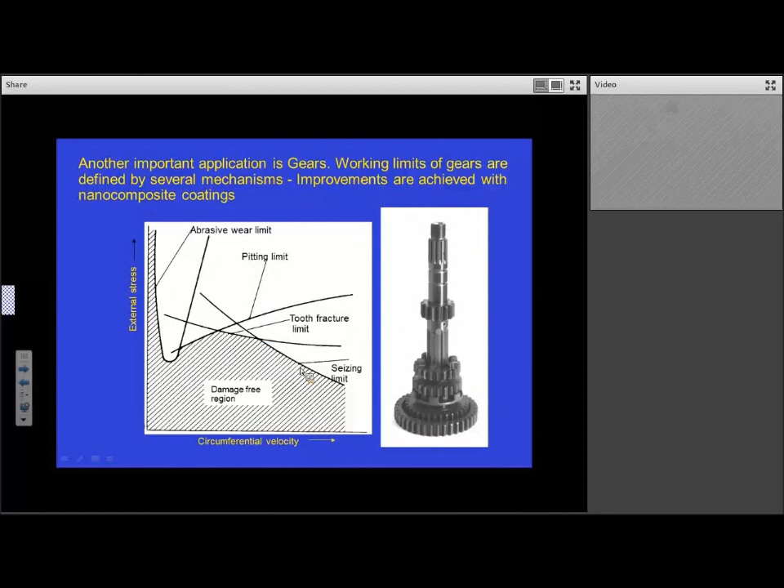Gears, as an example, where you wouldn't think they would work, but they expand the damage-free region for all these kinds of wear and failure mechanisms. This shows a typical gear and the effect that the nanocomposite coating can have on the fatigue life, the fatigue limit, the stress that can be applied without any fatigue occurring.

So these very thin coatings, maybe only 3 microns thick, can protect these gears under very arduous contact fatigue situations. Nowadays, many things we use, razor blades, car engine injectors, even the hard disk on your computer, has a nanocomposite coating on it. These tend to be chrome nitride based.

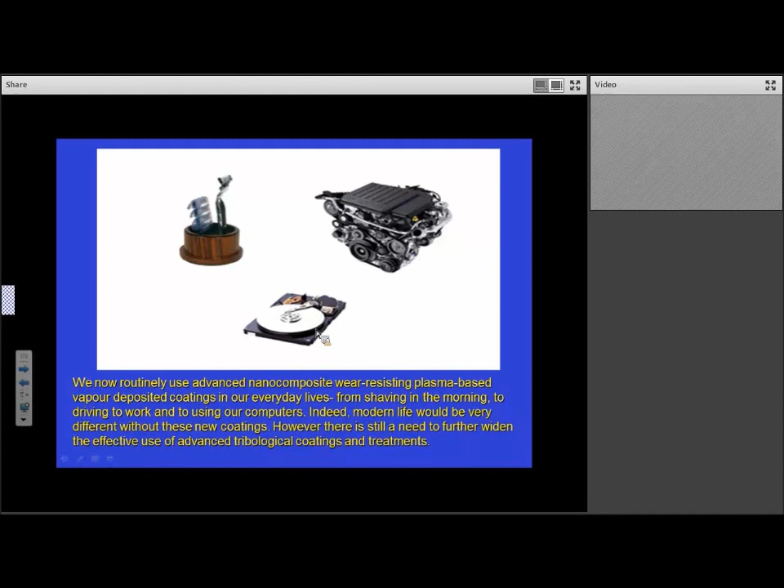I'm sure they developed them without even thinking about H over E, but it turns out that those particular coatings have a very high H over E, very elastic but hard.

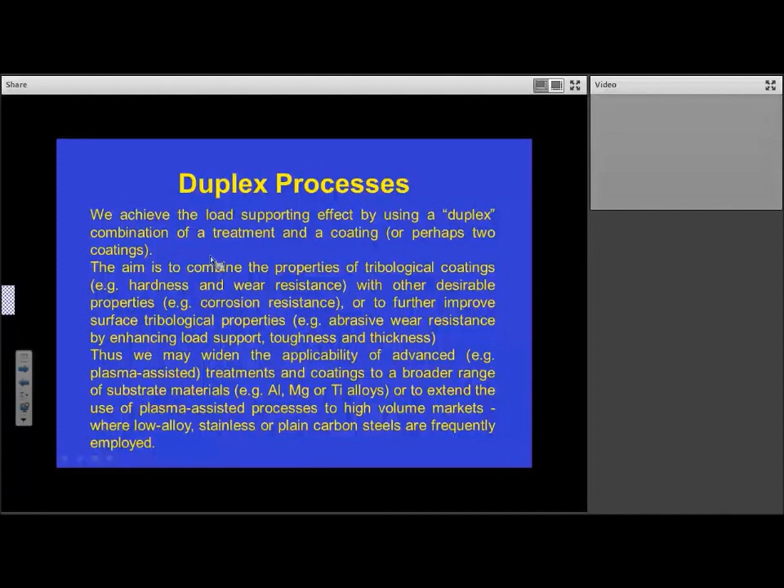Many people talk about load support, but they don't define what they mean. Load support is the ability to avoid different types of failure mechanisms due to deformation, like cracking of the coating, debonding, substrate elastic deformation, substrate plastic deformation, substrate fracture, or ploughing friction due to the deformation.

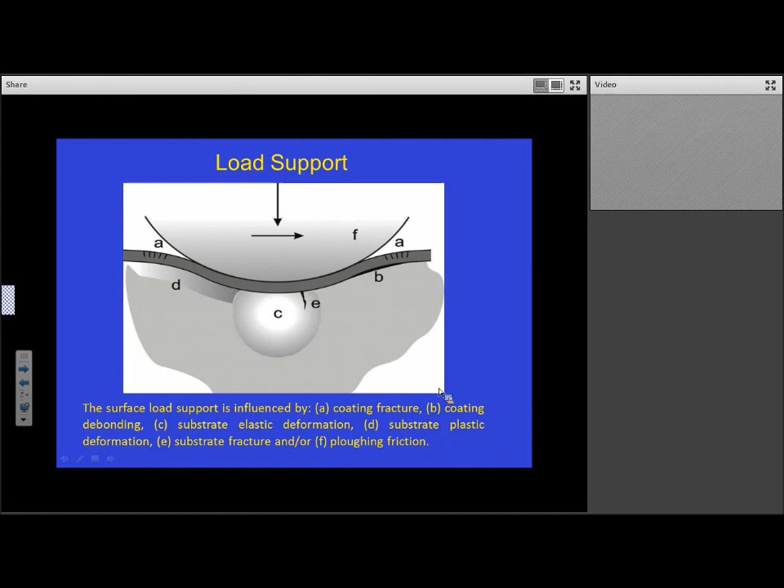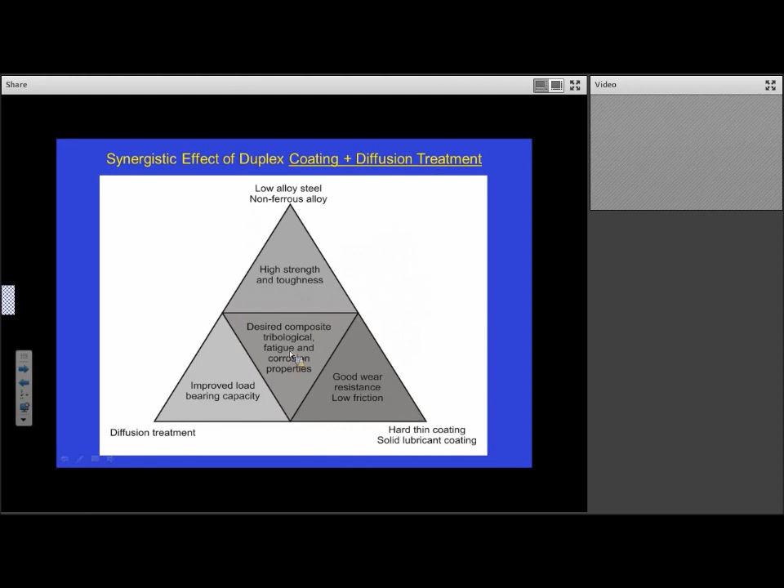So you need a hardening effect underneath the coating. You bring together either a low alloy steel or a non-ferrous alloy, harden it, maybe apply a diffusion treatment, and then maybe have a tribological coating on top to get the desired composite properties from the duplex. This was always the aim of Tom Bell, one of the earliest proponents of duplex technology, who always said if we could possibly reach a situation where we could treat gears and bearings to give them the same capability that steels have...

We never saw it in his lifetime, but we're seeing it now. We're now seeing bearings that can perform as well as or better than steel, and these were made of titanium alloys.

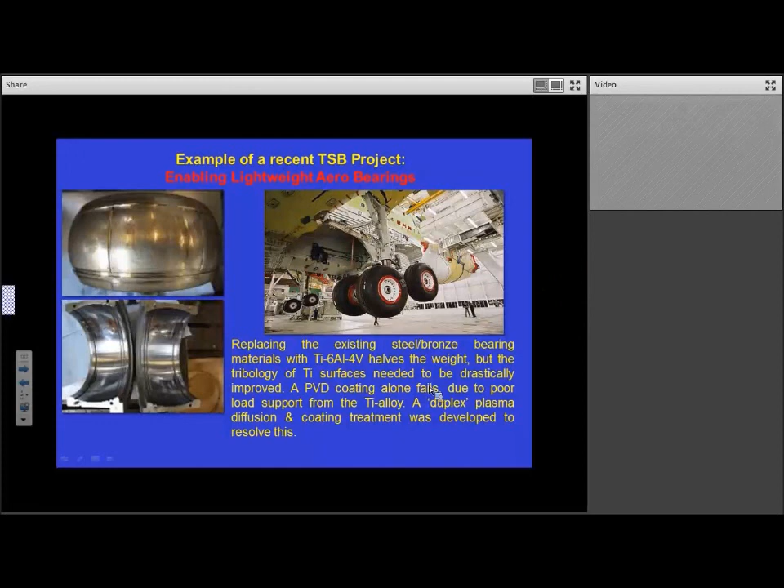We worked on a project, together with Warwick, Cambridge, TechVac and a bearing company, with my colleague Adrian Leyland, and we developed a pintle bearing which was able to replace a steel bronze bearing in an Airbus undercarriage and take out hundreds of kilograms of weight. That bearing, I'm told - I find it amazing - could save £7.6 million in fuel per plane over the life of each aircraft, or about 36,000 tons of CO2 per aircraft over its lifespan, enabled by this combination of an underlying hardening effect and an appropriate coating on top with the right hardness and elasticity.

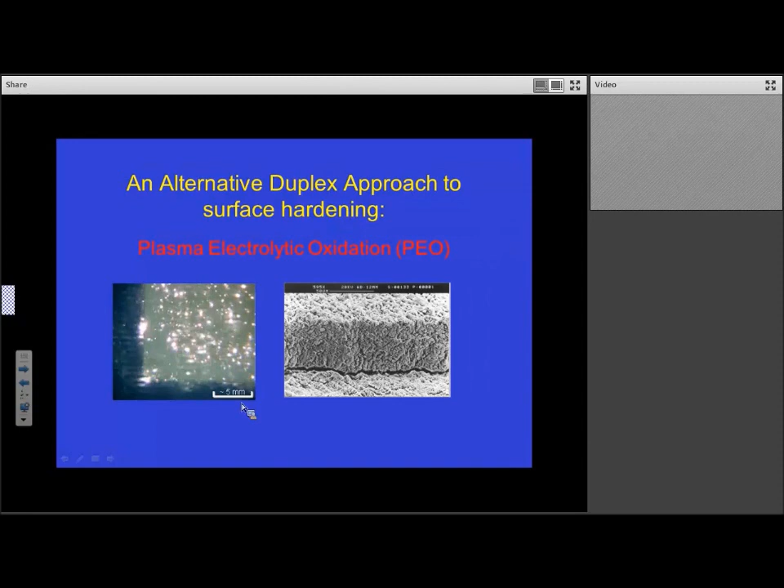Another duplex approach is to use something called plasma electrolytic oxidation. We have a world leader in this technology here at the university, Alexei Yerokhin, who developed this technique, which uses an aqueous electrolyte and is better than conventional anodizing in an acidic electrolyte, and better than thermal spraying in many conditions, producing a very dense coating.

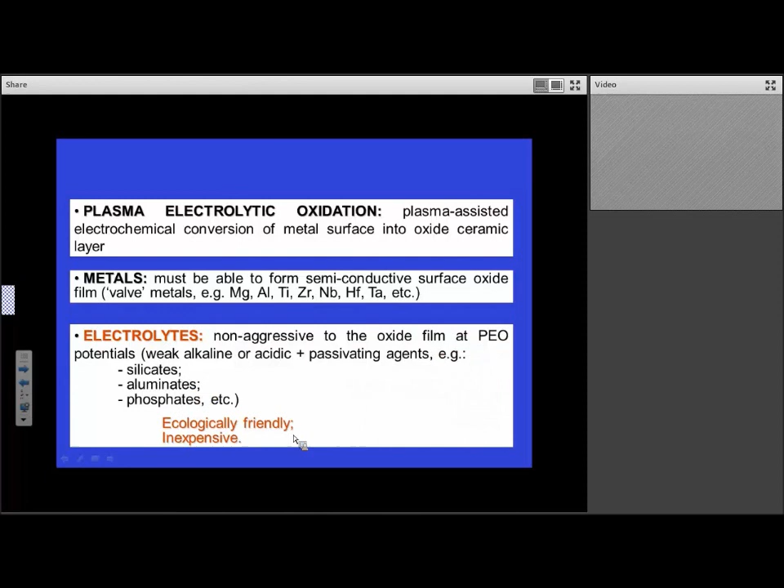The electrolyte is non-aggressive and safe - silicates, aluminates and phosphates are used. It's ecologically friendly and inexpensive. The process was originally developed in Russia, and one of the earlier proponents said it can give better wear performance at lower hardness, and I'm pretty sure that's because these coatings have a high H/E, and that's why they're so good.

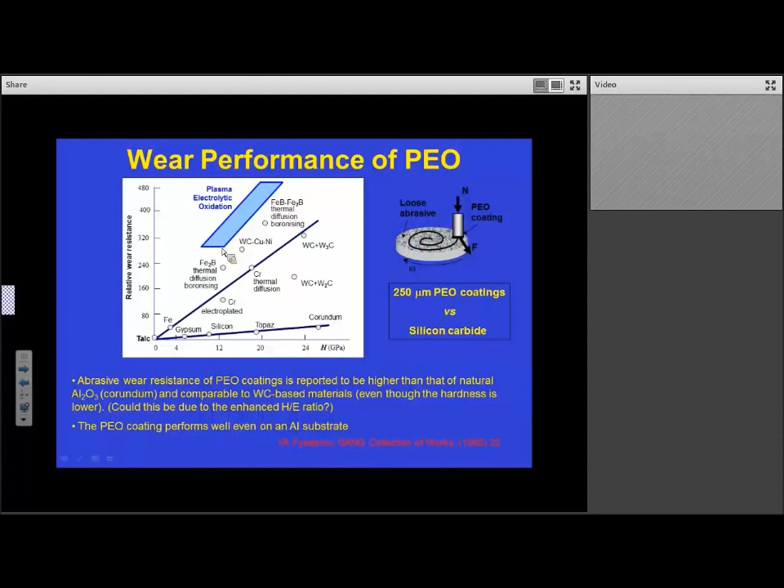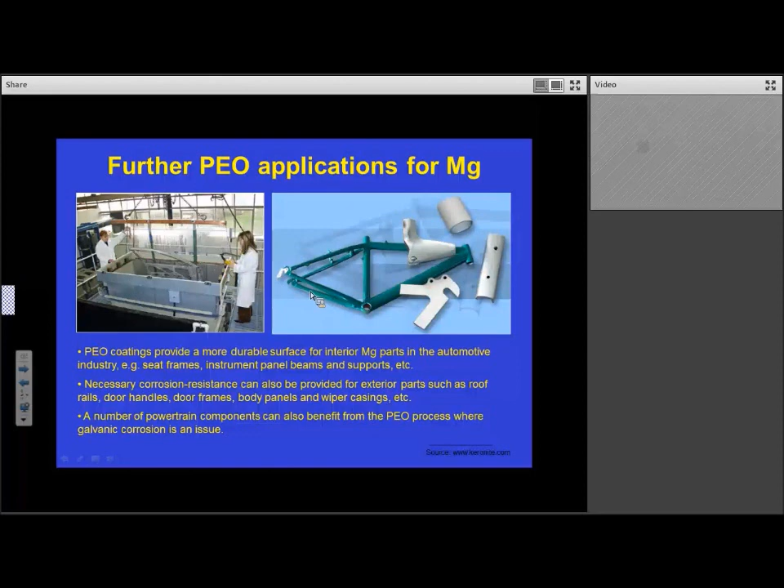Those coatings are now used in all kinds of applications, especially where a top coat is provided - maybe electrolysis deposited, sol-gel, or organic paints. I know there's at least one person online interested in the use of paints on top of PEO treated surfaces. We know companies are interested in large car parts, doors and bicycle parts - it's a process with a lot of opportunities and possibilities. I'd say it's environmentally friendly and has a lot going for it, but maybe not suitable for all tribological contacts if the contact pressure is too high.

So, slightly over Alex's prediction on the time, but hopefully we've got time for some questions.

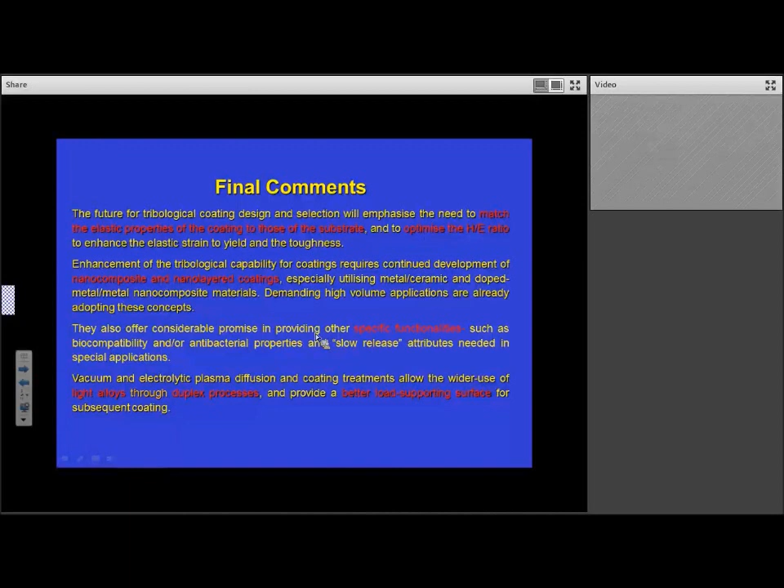We require matching the elastic properties of the coating to those of the substrate. Enhancement of those properties is best achieved through nanocomposite and nanolayered structures, and we can achieve specific functionalities such as slow release attributes with these nanocomposites. If we combine those with another treatment to get a duplex process, we get the possibility for even better performance. Thanks very much for listening.